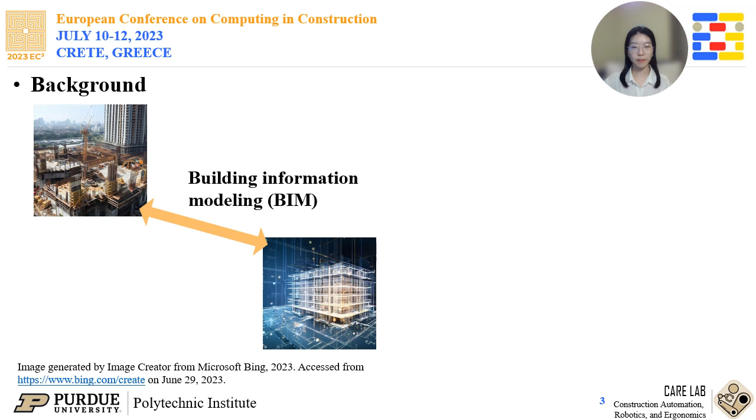And based on previous studies, we found that many people would agree that BIM can positively impact project performance. It can specifically help us with better schedule control, improve the project productivity and enhance the quality of design. But it's not just all about the good stuff. We're finding that BIM use comes with its own challenges.

For example, we found owner support might be lacking, and sometimes the project stakeholders might be struggling with the legal issues and the lack of proper standards, not to mention the high costs related to the BIM technologies. Well, these challenges can have some negative impacts on the project performance, and we have found an increase in the cost and legal risks. So it really made us wonder whether using BIM can be really beneficial to the project performance.

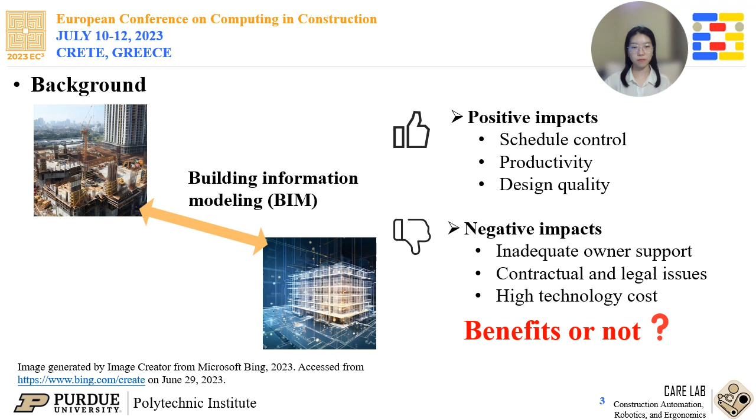When we talk about the impacts of BIM, researchers have been looking at project performance by various indicators, from broad ones like the cost and quality to specific ones like the request for information, change orders, or the time savings. But we found only a few studies have checked whether using BIM really made a difference in project performance.

And based on previous quantitative studies, we have found that BIM impacted project performance across different stakeholders, like the designers, owners, and contractors. Also, the previous studies have considered factors like the age and the size of companies, individual characteristics, and sometimes they also talk about the types and locations of projects.

Even though we found some relationships between BIM's impact on project performance and these individual or company or project characteristics, there is no quantitative study comparing BIM's impact on project performance between BIM projects and non-BIM projects, specifically in these 3 aspects, which are business types, the years of working experience, and the countries where the BIM projects are located.

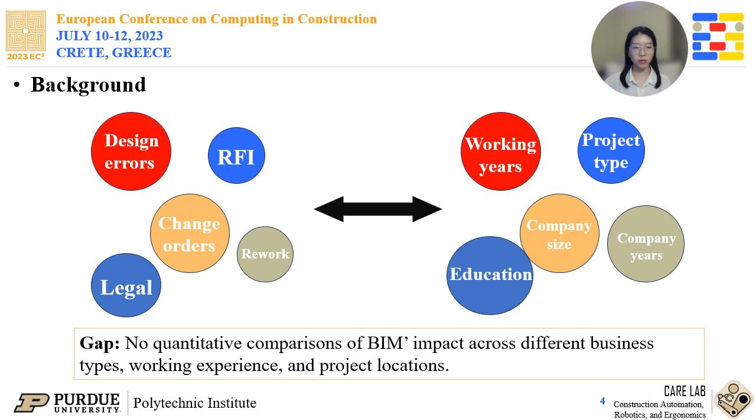So in our study, we have compared BIM's impact on project performance between BIM projects and non-BIM projects across these 3 aspects. Based on the literature review, we have found 12 indicators, and it is really important to understand how these indicators work. So we just split them into 2 groups based on the following rules. For the first group, we think the ratio greater than 1 indicates better project performance. And for the second group, we think the ratio less than 1 means that BIM is having a positive impact.

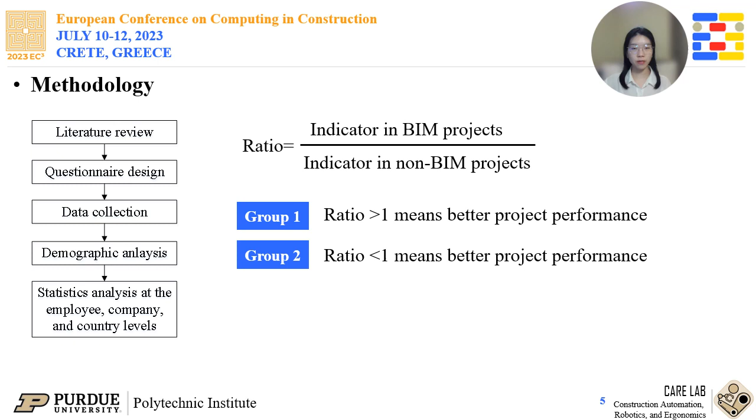Now let's look at some examples. For the first group, let's look at the number of pre-construction RFIs. If the ratio of the pre-construction RFI is greater than 1, it just means that we are finding more RFIs before the construction stage, and this is a really good thing because it means that we can deal with the issues without delaying the project schedule.

What about the second group? Let's look at the total number of the change orders. If this ratio is greater than 1, it just means that BIM projects are seeing more change orders than non-BIM projects. And this is a negative impact because previous studies have proved that change orders can often lead to higher contract prices.

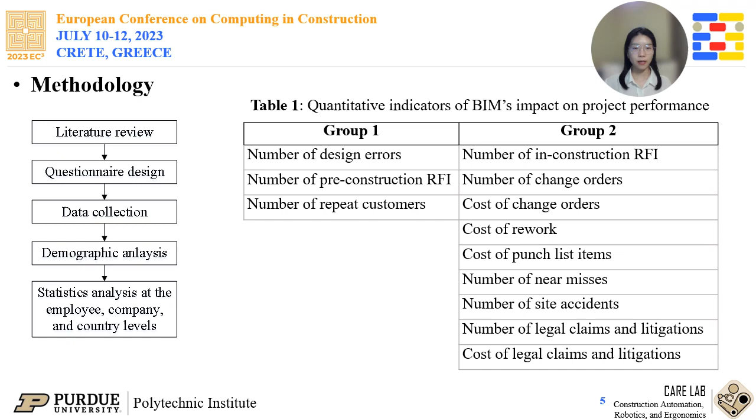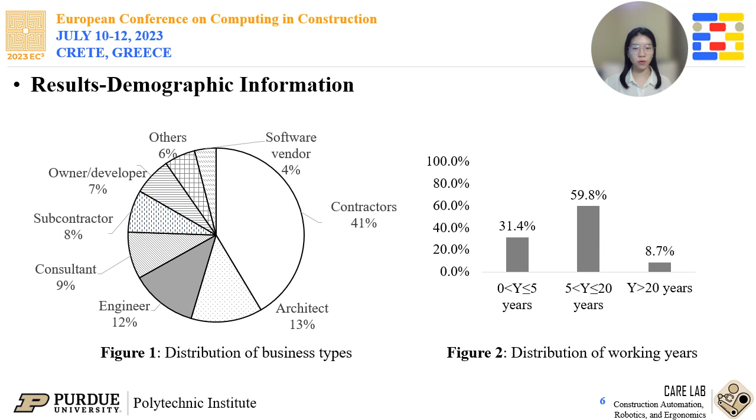So based on these indicators, we designed a questionnaire to collect this data. Our responses primarily came from the AEC industry professionals, and we found most of them had BIM working experience between 5 and 20 years.

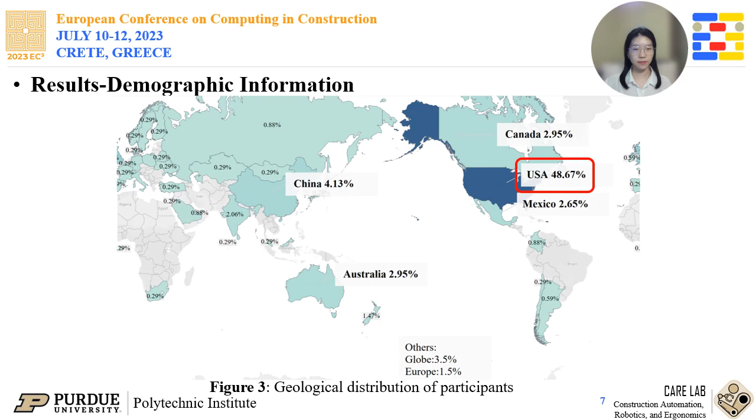BIM projects that we studied were primarily located in the United States. Well, let's look at the results of our data. For the first group of indicators, BIM projects outperform their non-BIM projects. Why is that? Well, they have found more detected pre-construction design errors, more detected pre-construction RFIs. RFI means request for information, and more repeat customers.

However, things were a little bit different for the second group of indicators. The use of BIM seemed to have resulted in a decline in the overall project performance, and it was specifically with the total number of in-construction RFIs.

In addition, our data also found a significant skewness in these 12 indicators. While skewness can be caused by several factors, such as the sample size, extreme values, or the nature of data, in our case, the skewness might result from the business types, BIM experience, or the countries. So let's look at how these factors influence BIM's impact on project performance.

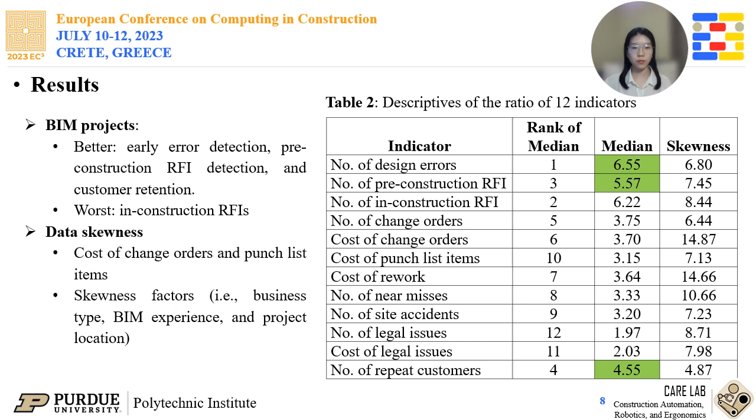For the first group of indicators, in terms of business types, software vendors and architects have found fewer design errors and fewer requests for information before the construction stage. Also, the software vendors got fewer customers coming back for their BIM projects, and architects didn't get any more.

However, we found that using BIM really helped contractors find almost 8 times more design errors and requests for information before the construction stage, and brought way more repeat customers to them. So we can see that BIM had really a different impact on project performance across different types of business.

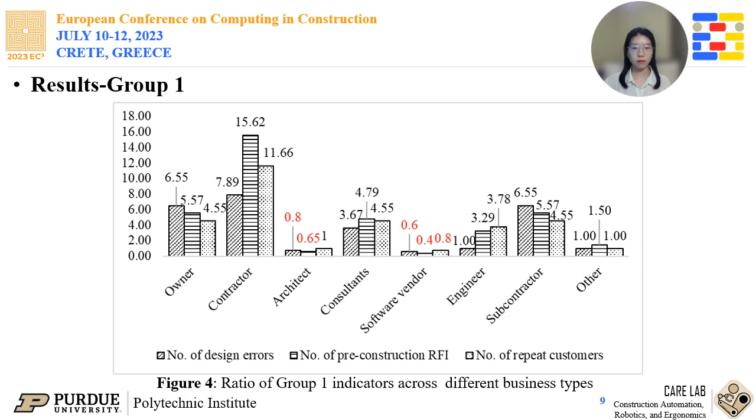What about the results in terms of working experience and countries? For those who had less than 2 years and 5 to 13 years of working experience, BIM had helped them to find more detected pre-construction design errors and more detected pre-construction RFIs. Also, BIM really helped them to get more repeat customers. However, for the other participants, BIM led to a decrease in detected design errors before the construction stage.

And in terms of the countries, it was a little bit different. We found that in the countries including the United States, BIM had really helped them to find more design errors and more requests for information before the construction stage. But for those who did BIM projects only in one country, and these countries are not the United States, using BIM has led to less detected errors and requests for information.

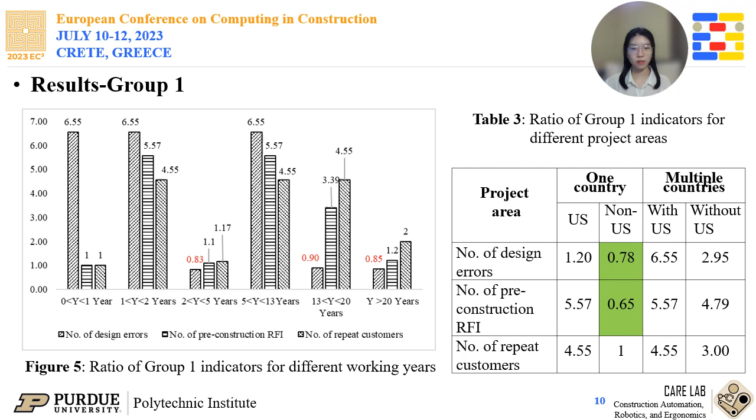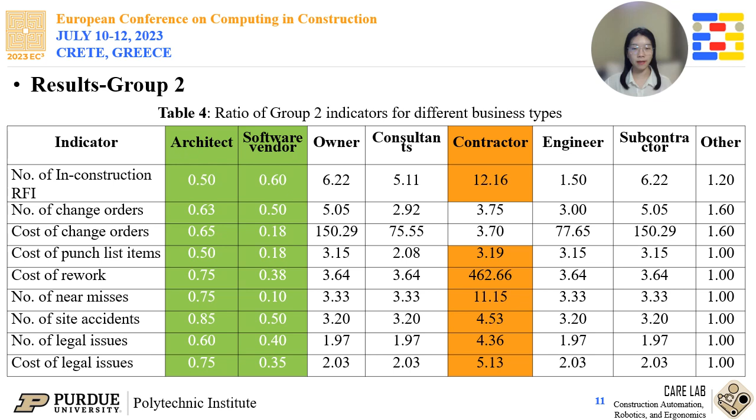Now let's move on to the second group of indicators. First of all, in terms of business types, we found that software vendors and architects benefited from BIM projects, particularly with the reduction in near misses and the reduction in the cost of punch list items. However, contractors really experienced a lot of negative effects from the BIM projects, particularly with the total cost of rework, the total number of in-construction RFIs, and the total number of near misses.

Well, speaking of the project areas, we found that respondents who were involved in the BIM projects in the United States or multiple countries were facing more challenges compared to non-BIM projects, particularly with the increase in construction RFIs. And for those who use BIM only in one country and it is not the United States, BIM use was found to improve project performance, especially with the decrease in construction RFIs.

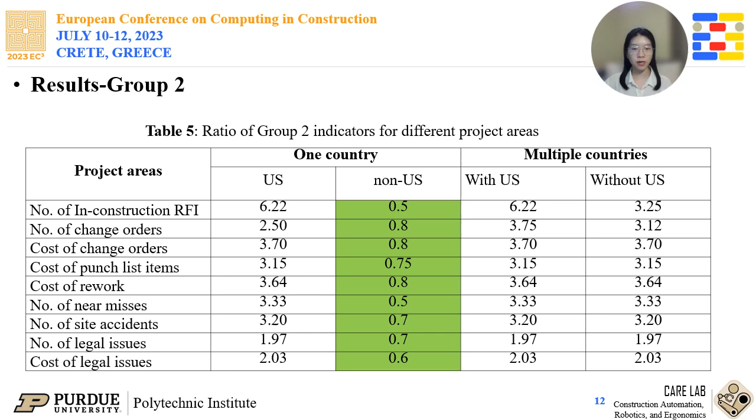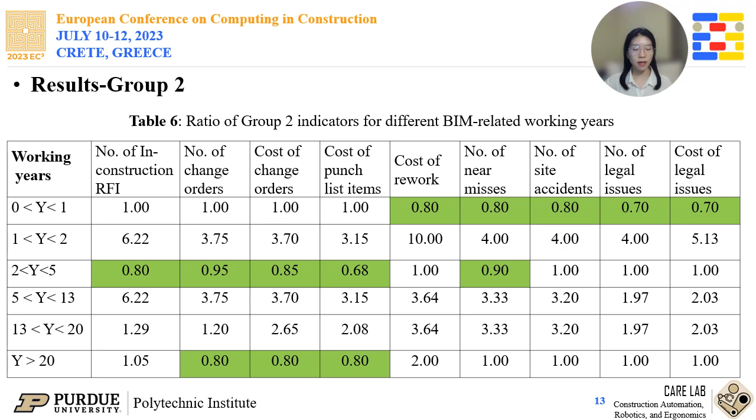Now, what about the results across different working experience? We found that BIM had improved a few aspects of project performance for those who had less than 1 year, 2 to 5 years, and more than 20 years of working experience.

Well, in conclusion, our study has found that BIM can bring both positive and negative impacts on project performance. First of all, in terms of the positive impacts, we have found that BIM is particularly useful in the detection of early design errors and pre-construction RFIs. In addition, BIM is really beneficial to bring more repeat customers to the project stakeholders. For some project stakeholders, BIM is beneficial to contractors before the construction stage and beneficial to the software vendors and architects after the construction stage.

On the other hand, BIM also led to some negative impacts on project performance, such as bringing more in-construction RFIs and increasing the cost of change orders and punch list items. In addition, we found that BIM experience did not guarantee better project performance. Also, for the project stakeholders, contractors were found to face difficulties with in-construction RFIs and the increasing costs during construction. And the software vendors and architects were suffering from detecting early errors.